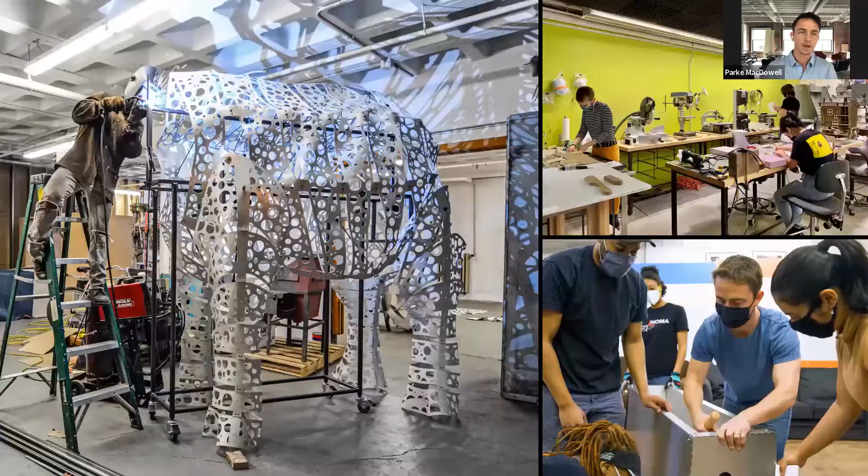Now, I'm going to speak a lot about making things today, but while I am interested in tools and craft, I am most interested in this approach because it has proven to be an incredibly potent way to expand architectural agency, to empower our design process, and to communicate it more effectively. And ultimately, this should be our aspiration as architects. We do not build buildings. We conceive and communicate design ideas, and making things can help us do that better. And that leads to the agenda for this presentation.

But before I get into that, if you'd indulge me, I want to challenge you each with a prompt. What is your role in a story that is bigger than you? How might you take your interests and your experience and your aspirations and compose them into a coherent narrative? And then how do you take that narrative, which is about you, and find a place for it in the broader world? What is your role in a story bigger than you?

And I say this because, well, it's twofold, really. One, because I find it a helpful device for understanding myself and for making decisions about how to invest my energy. And two, I think Earl Flansburgh, whether consciously or not, did this very well, specifically in the way he positioned himself as a vehicle of positive change within our profession, which you see continue even in his legacy.

So now in that vein, if I was to try and put my professional narrative in a single sentence, which is reductive, but I think it can be an asset, that sentence might be something like, I use fabrication to expand architectural agency, to foster shared authorship, and to position my collaborators for success. And over the next 40 minutes or so, I'll show you what I mean by that.

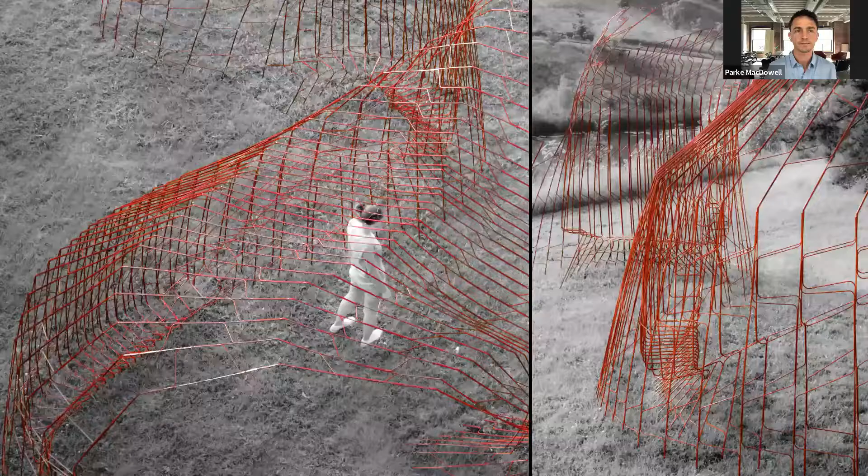I'll start by using a selection of projects to connect the dots from my graduate school exploration to recent forays through my work at NADAAA and various independent collaborations to my role at Payette and to my broader aspirations for architecture.

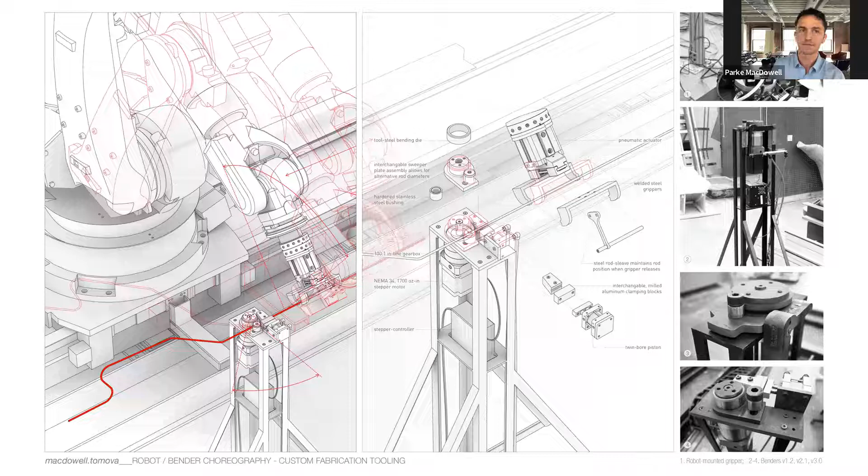Now, this work is from 10 years ago when I was in grad school, and my wife and I made a pavilion out of bent steel rod. And it was large, a footprint of about 20 by 30 feet with a height up to 14 feet. And its form was developed using scripting, as well as the choreography, which was developed using scripting for the 7-axis robot and the bending tool that we built to shape the rods. Each of these uniquely shaped rods was broken into segments of lines and arcs, and then this geometry was parsed into movement commands for the robot and the bender.

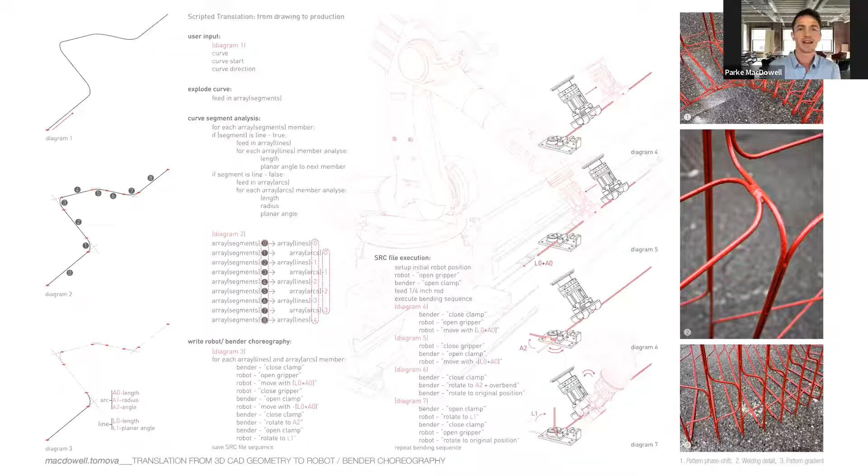And now this work is from last year. And you can see the parallels with the earlier project. The facade sculpture that you see here marks the entry to an apartment building and a courtyard garden on Amsterdam Avenue in Manhattan. And we fabricated it in the shop, and then swung it into place as a single piece. Now, this was a collaboration with Smith & Co. Architects out of New York City and Concentric Fabrication.

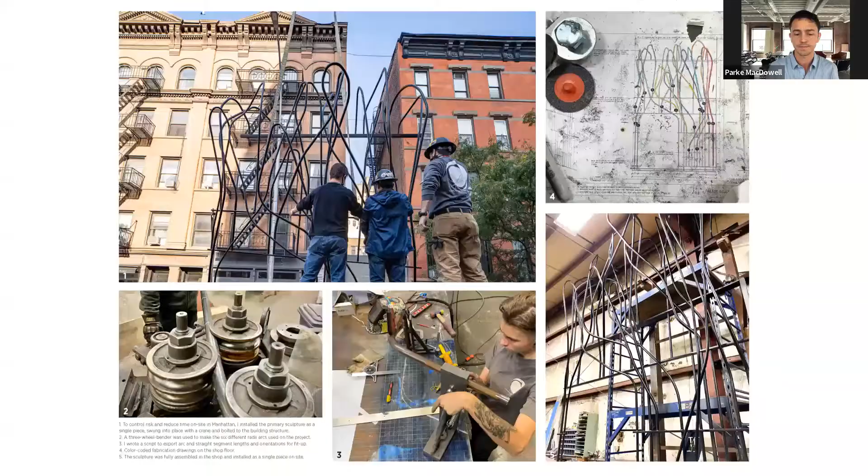And I believe some of these folks are on the call now, but outside of my job at Payette, I do this kind of independent work with fellow designers, with builders, and private clients, particularly on projects with complex detailing, novel geometry. My inclination to strategically collapse this conventional gap between the designer and the builder provides fruitful territory for innovation and added value for all parties. You see some of that process here, everything from shop drawings to the bending tools to the installation on site.

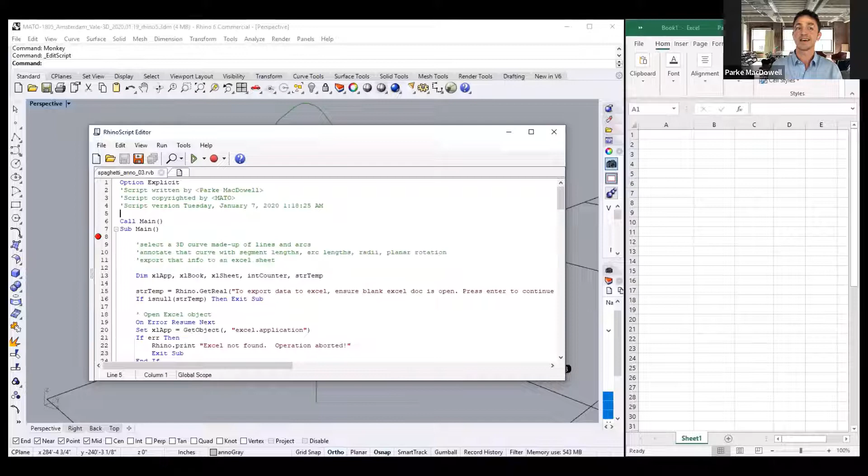And now this screen captured video shows how I took that organic geometry of the sculpture and parsed it into simple fabrication instructions. I separated the unique curved pieces and ran a script, which I wrote to identify the line segments and the arcs that make up each piece, and then export that to a cut list, an Excel spreadsheet, and also annotate the 3D model to include the orientation of each segment relative to its neighbors, which aids with assembly.

This kind of network design process is very much in the spirit of how we work at Payette and also at NADAAA, where I worked for several years right after grad school. I owe a great debt to Nader and to Arthur and Katie and the rest of my colleagues there at NADAAA for shaping me into the architect I am today.

And you can see I crafted a position for myself there, as well as at Payette, that didn't really exist previously at the firm. And that was mostly about reclaiming for the architect some of that territory occupied by the builder, that is actually physically executing our ideas.

And at NADAAA, we did design build work for commercial spaces and custom furniture for private clients, in addition to prototyping and material explorations. And we also made a lot of really exquisite models, which were rarely strictly representational. They instead used abstraction to foreground the architectural priorities of the different projects.

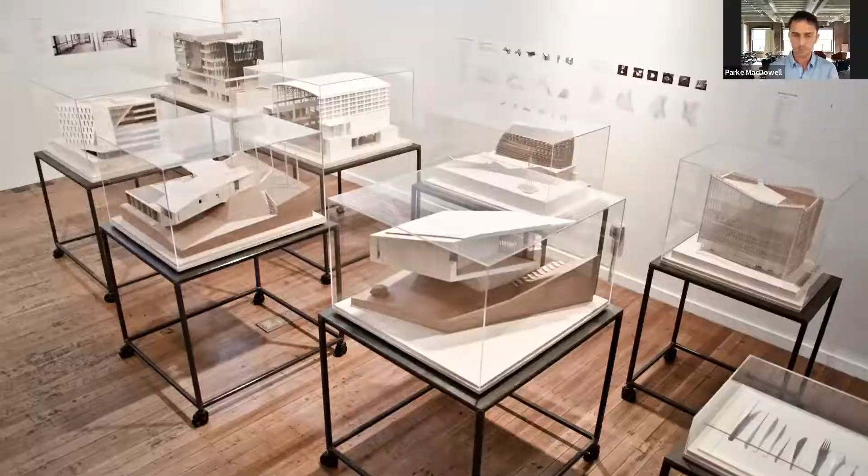Here you see models for 2 residential projects, as well as a section model for the University of Toronto School of Architecture, which I'll actually talk more about the warped ceiling you see in that section in just a minute.

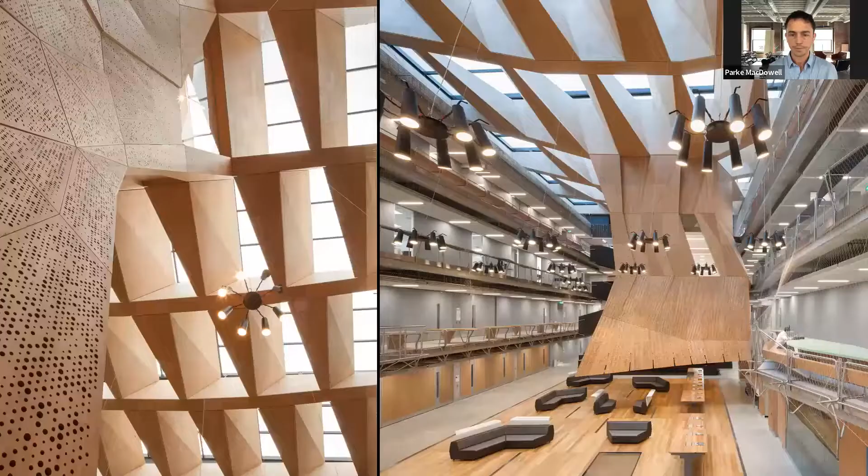Both the fabrication experience and the computational design came into play with this work at the University of Melbourne School of Design. This is a project that NADAAA did with John Wardle Architects, and it supports a built pedagogy where tectonic and programmatic relationships are expressed in an exaggerated way to encourage academic dialogue.

What you see here is the suspended studio, we called it, which hangs like this distended coffer in the center of the atrium. And it's actually really important for the acoustics of the space, both in its geometry and in the scripted perforations that you see in the image on the left.

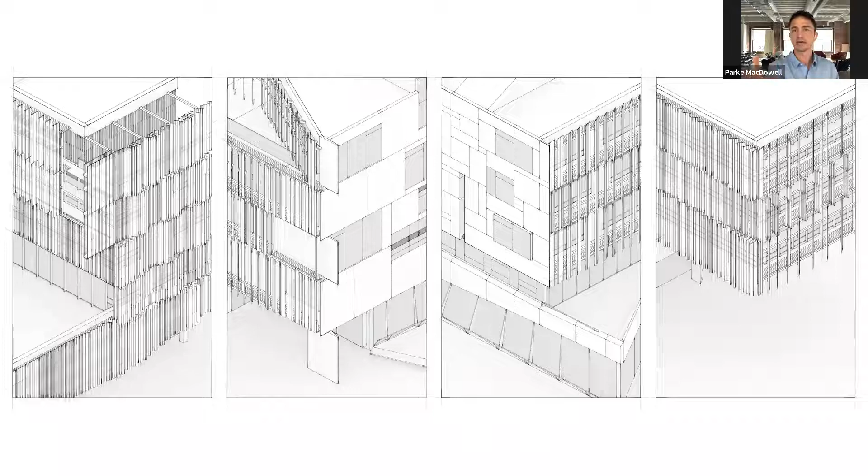The exterior of the building is similarly didactic, that is kind of about teaching. Each of the 4 elevations of the building is doing something different. So the corners where these faces connect become an expressive representation of the dialogue between these different actors. And it's those vignettes that I documented in this drawing. And you see it play out in the actual building. You see the southeast corner shown here, where 2 of these different faces collide at the intersection.

Previously, I showed that section model of the Toronto project, the School of Architecture. This project was a really important affirmation for me of the value of having in-house fabrication capabilities in an architecture firm. We had this exuberant warped ceiling, and it had skylights in it. It really dominated the expression of the upper level studio, which was one big room. And it was in danger of being cut from the project because it looked unconventional, and the builder had priced it with the expectation that it would require custom architectural framework and specialty plastering.

But by making a full-scale mock-up, we showed that this hyperbolic paraboloid shape could actually be made with straight metal studs and conventional drywall detailing. And this was huge. It reduced the price. The contractor rebid it and reduced their cost by 50%. And this overall key design feature remained in the project.

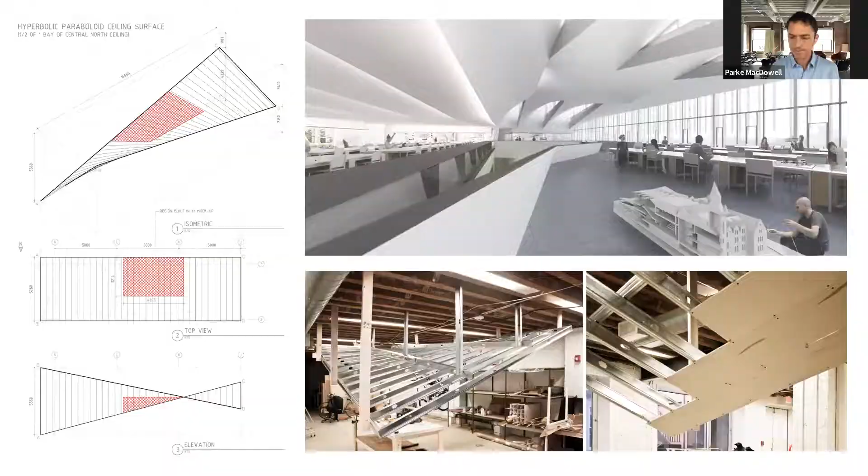Here you see the full-scale mock-up that we made in our basement shop there. And here's the same approach deployed at full scale on site. And now the finished result. It's an incredibly powerful way to retain architectural agency. And that kind of approach, it adds value at any scale.

If we can embolden ourselves as architects to consider the means and methods as part of the design process, we can do incredible things. I'm not saying we should own the means and methods contractually. Usually we definitely should not do that because it's not under our control, but we should own the means and methods intellectually, in dialogue with the builder. This is how we win design authority.

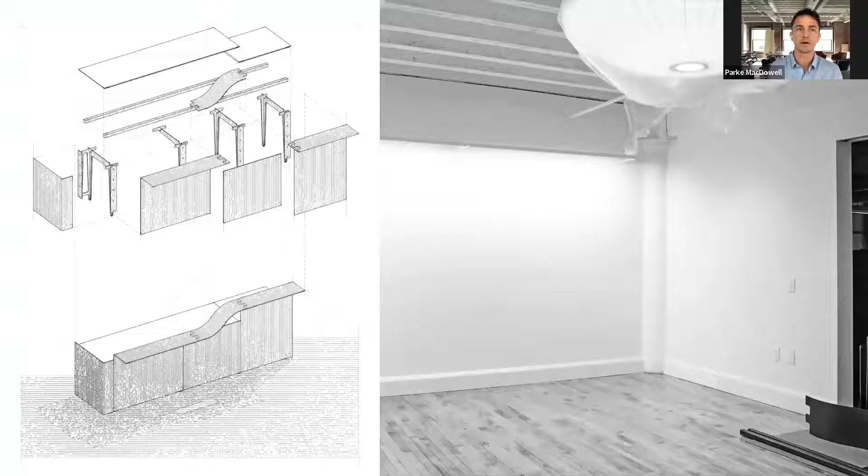You see in these images a few smaller collaborations with other architects in Boston and New York City, like ZH Architects and Chad Smith. On these projects, I was the metals fabricator and a design consultant to the architect, contracted directly with the owner. This was a recent furniture installation with Mark Carriega. And by intellectually owning the means and methods, we were able to wed the geometry with the fabrication constraints and the logistics of installation to produce a really successful project.

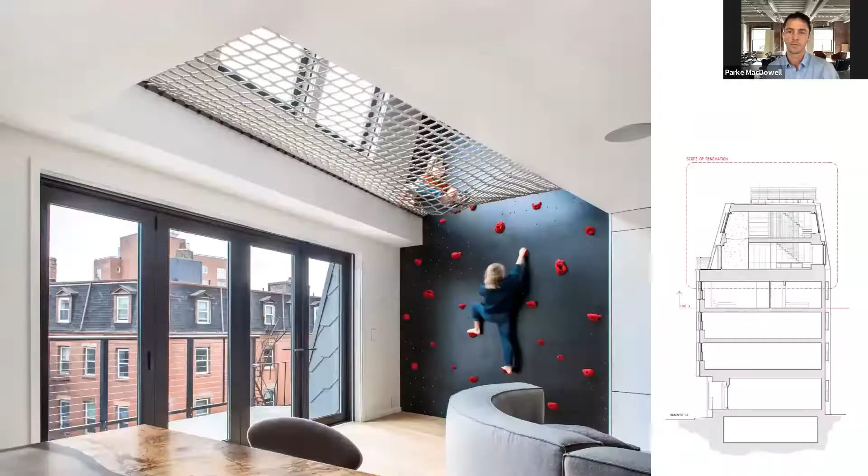And when I am both the architect of record and the specialty metals fabricator, this effect is magnified. This was a renovation project for a client in the North End whose kids go to school with my kids. Their apartment was the top 3 stories of the 6-story building. And the top 2 stories actually were an unpermitted addition from the early 80s, and it was plopped on top of a 100-year-old tenement building. And that addition was their primary living space, but it was cramped and closed and inconsistent with the way they aspired to live.

So we reconfigured the vertical circulation. We made it more efficient. We opened it up to the city and the sky and had a bit of fun with it. It was an ideal client and an ideal scenario where they invested in thoughtful design early in the process. They locked in decisions and then allowed construction to proceed linearly without any significant changes.

So this section shows the thick poche of that original roof and the stacked stairs, which was part of our renovation. It led to a huge operable skylight in the roof deck. Then you see also the rock wall and the climbing net and the folding glass doors that open to the street along the 5th floor frontage.

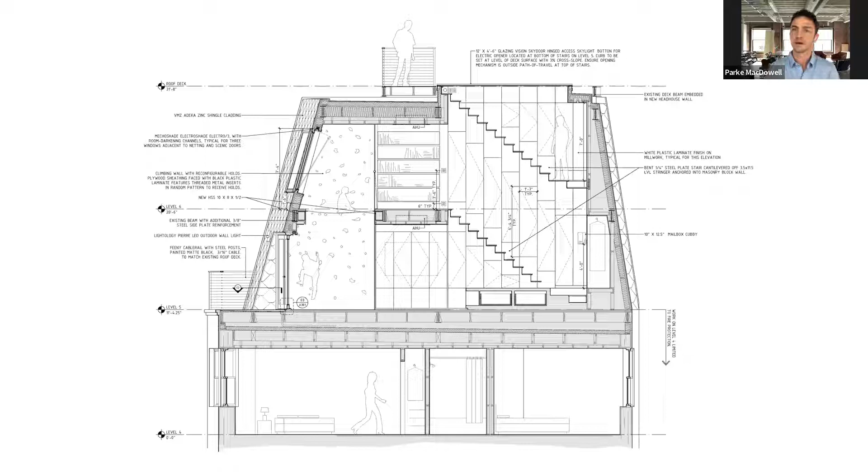This is a lot of steel for a residential project, but it had some curious loads. And the structural engineer for this project was Becker, which became Thornton Tomasetti partway through. And you can see what the implications were. The builder, Konya, did a great job executing this work as well as the overall scope. And then Jedi and Sun Engineering did the MEP and the HVAC. It was a great team.

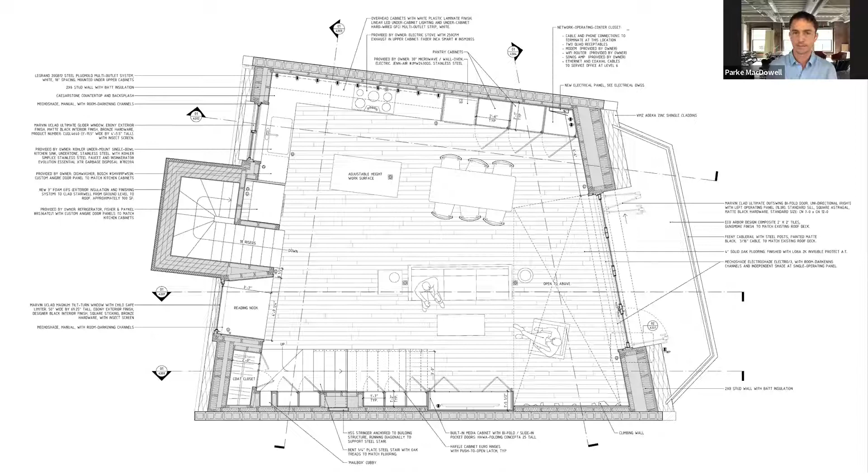This plan shows the 5th floor. It's a single open space for the kitchen, the dining, and the living room. All the odd angles of the existing condition were both a challenge and an opportunity for this project. There wasn't a right angle in either plan or section.

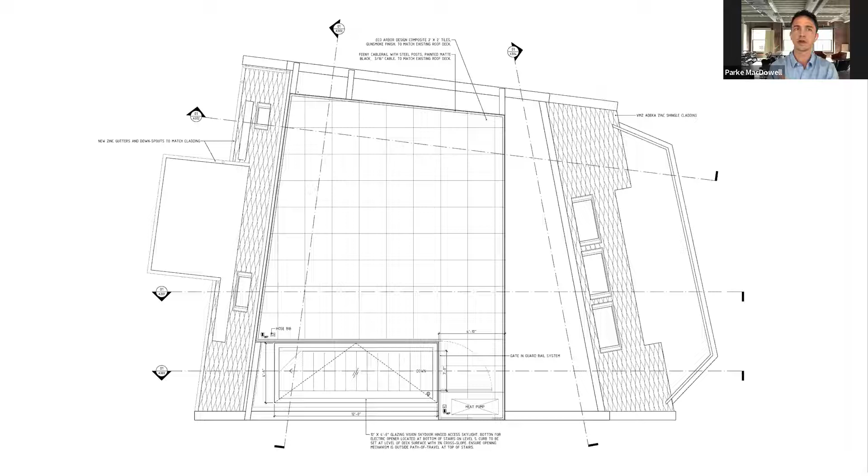We didn't want to go through that protracted process, and we had a very tight budget, which is why, though we had a traditional design, bid, build procurement process, I ended up taking on the key specialty features myself. And that's the climbing net detailing and the custom stair. Because I'd already figured out how to build that stair and the net in the process of doing the architectural drawings, I could underbid any of the specialty metal subs and still maintain healthy margins.

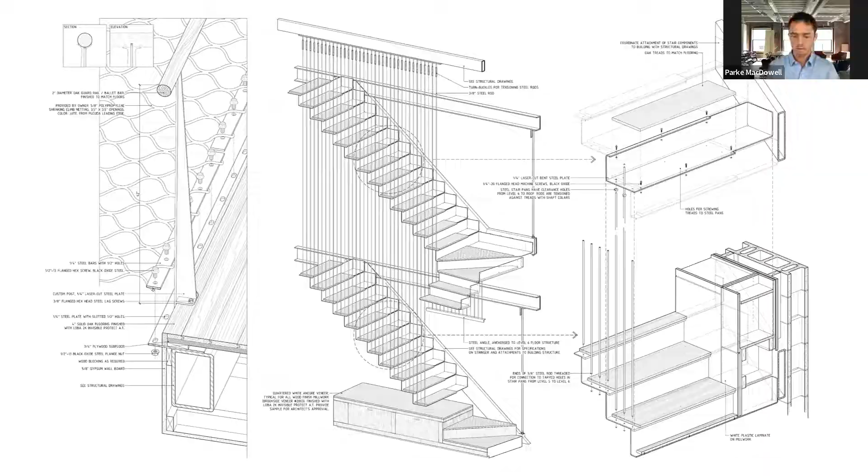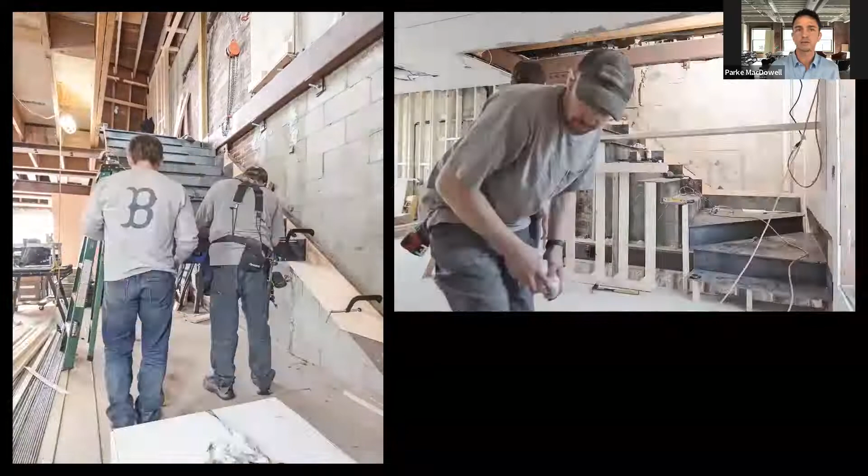You can see these drawings in front of you. They were actually pulled directly from the bid set and the permit set. So it was highly resolved. And so we built it. And you see that process unfolding here. We went from a detailed 3D fabrication model in Rhino to the cut and bend files, which I sent to the material supplier. And then we installed it on site with great speed and accuracy.

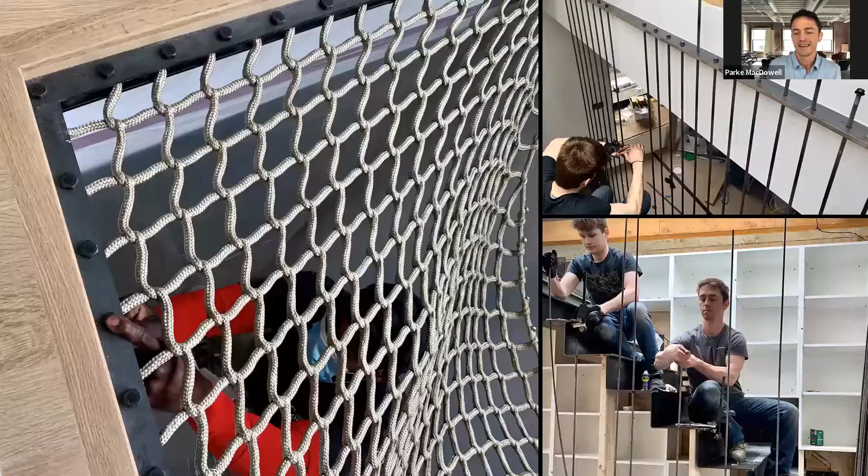Here you can see us cutting threads in the top right image in the top of the rods, so we could tension the 3/8 rod on the far side of the stair. Also the clean detailing of that robustly engineered climbing net, from which you can look 6 stories down to Hanover Street. And then some images of the completed stair to the roof deck at the conclusion of the project. If you look carefully, you can see the hidden storage wall behind it.

And actually the winders that are shown here were a late-breaking addition to the project to accommodate some unforeseen structural conditions. But even though it wasn't in the original design, it became one of my favorite details. And I kind of relish it, even as a little lesson. When things go awry, it really lets us show what we can do. And so this was one of those opportunities.

But regardless of whether it's the design of an object or a small residential project or a large academic or medical campus, I'm really just deploying the same bag of tricks. I'm inspired by the discovery and the cultivation of relationships, whether it's the intricacies of a connection detail or civic scale social choreography, arranging shapes, composing a project team. For me, this is the essence of design, the manipulation of these relationships, the crafting of these relationships.

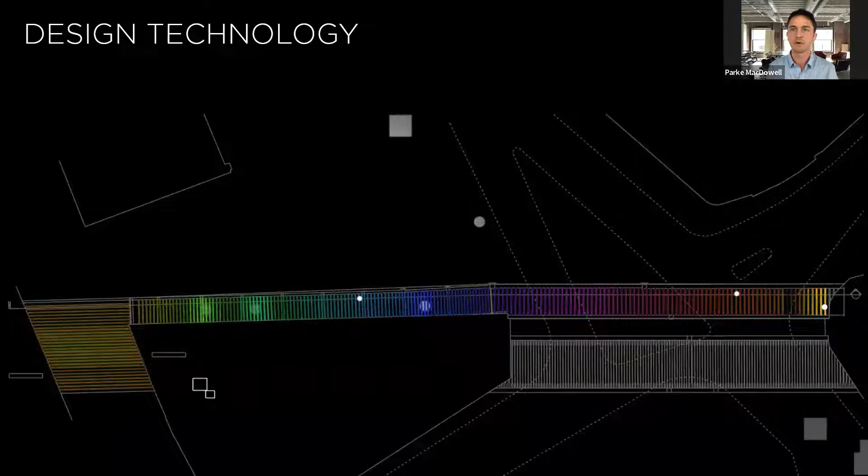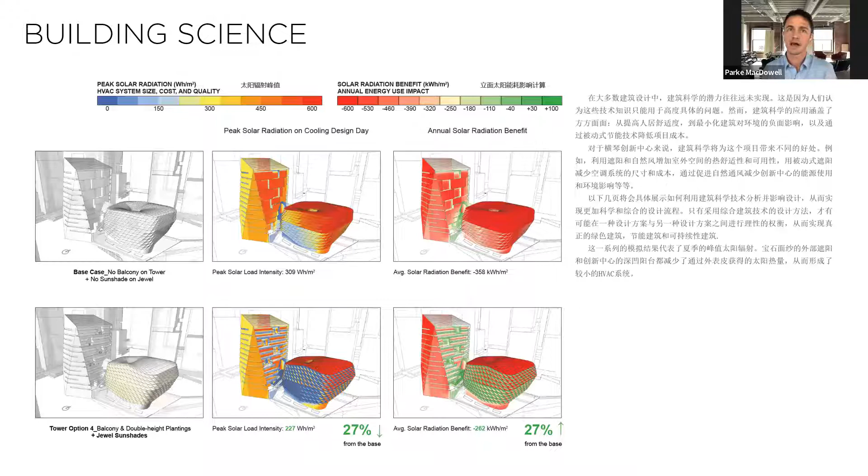Our building science group works side by side with our designers to ensure we're consistently forging new ground on issues of technical performance, sustainability, responsible design. And in the process, we educate and empower all of our staff to develop their own expertise.

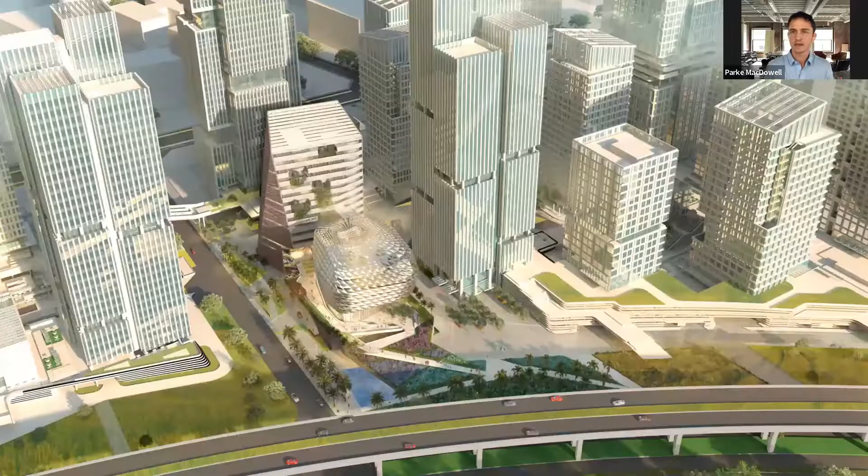And in so doing, we're able to deliver an architecture that is more formally exuberant, more delightful from the experiential side, because its aesthetics are underpinned by this rigorous analysis, like this research tower and a conference center in China. It's actually under construction right now in a brand new science city.

And the solar veil that you see around this conference center, it was an area of particular focus for me, both in the development of the geometry, as well as in the communication of the core design priorities and the tectonic logic to our collaborators overseas in China. I'm actually going to work on this right after this presentation.

We're developing a mock-up to show how they can build these custom curving sunshades. Every one of them is a unique shape, but I think we can build it all efficiently out of flat laser cut parts. So that's what we'll prove later this week.

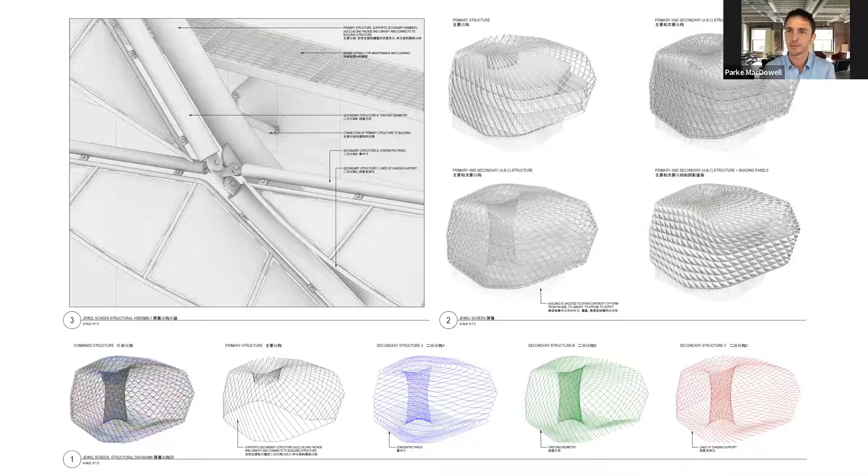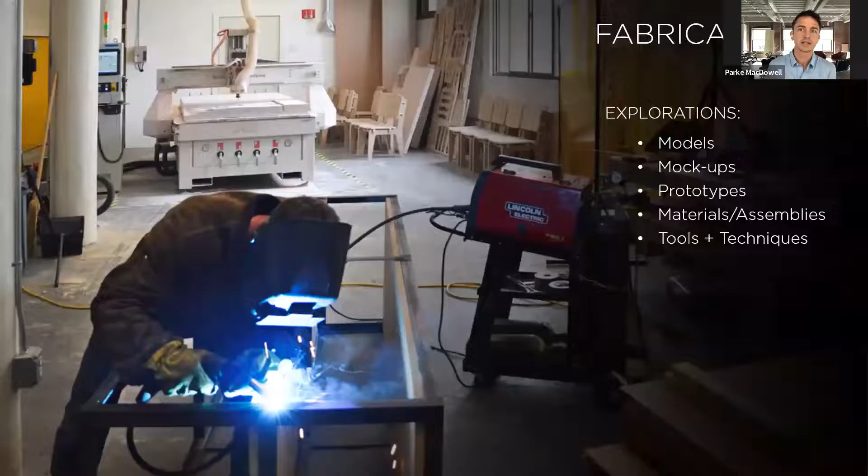In-house fabrication, it's become a defining aspect of our design process and who we are at Payette over the last 5-10 years. This is something that's really burgeoned and it continues to evolve. For us, in-house fabrication is not about tools and equipment. It's about positioning our agility and our energy for maximum effect in the face of what are inevitably evolving aspirations and opportunities. That's why we're here.

That's why we're making the models and the mock-ups, the prototypes, the furniture. This is the process we want to support. We make things to support those broader priorities. How do we make both our architecture and our design process itself more engaging, more thoughtful, and more beautiful?

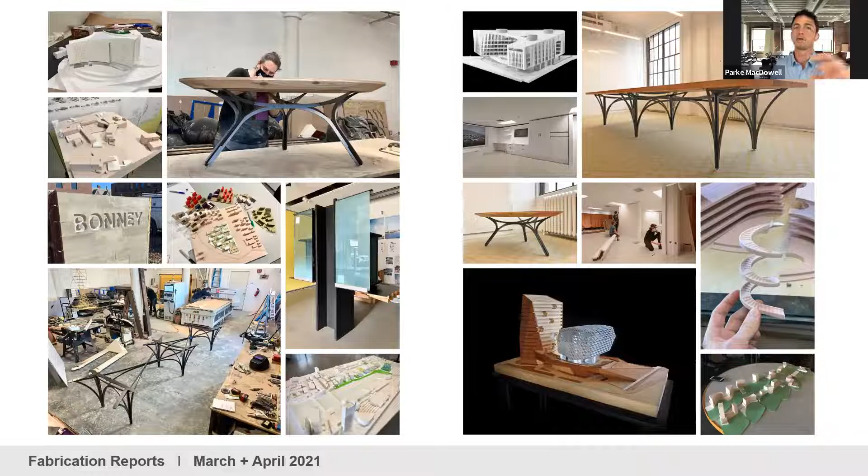What I'm going through here now are snips from our fabrication reports, each of these squares representing a month, so 2 months per slide here. My role is really about crafting a curriculum and a culture that enables and channels this energy.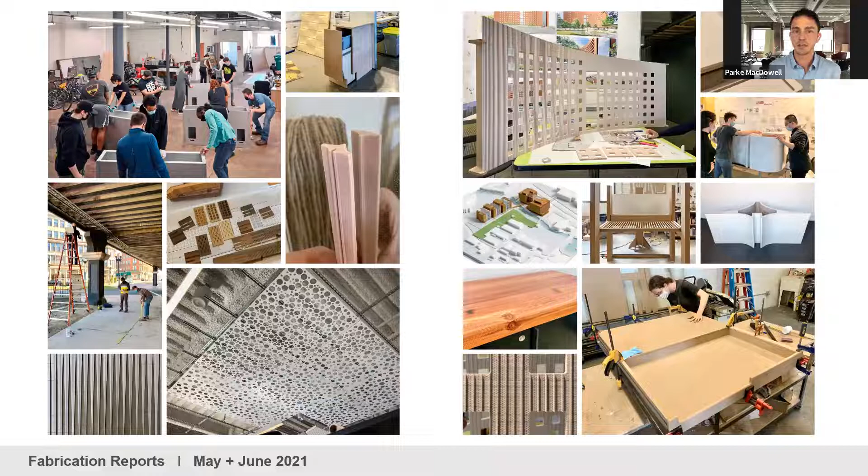We've got a model shop in the middle of our studio, just across the hall from where I am now. And then we also have a fab lab, a rough space where we've got our CNC router and our welding equipment. Here in the office, we've got our laser cutters and 3D printers and the rest. And we make these models and mock-ups and prototypes, and increasingly we're doing furniture installations as well.

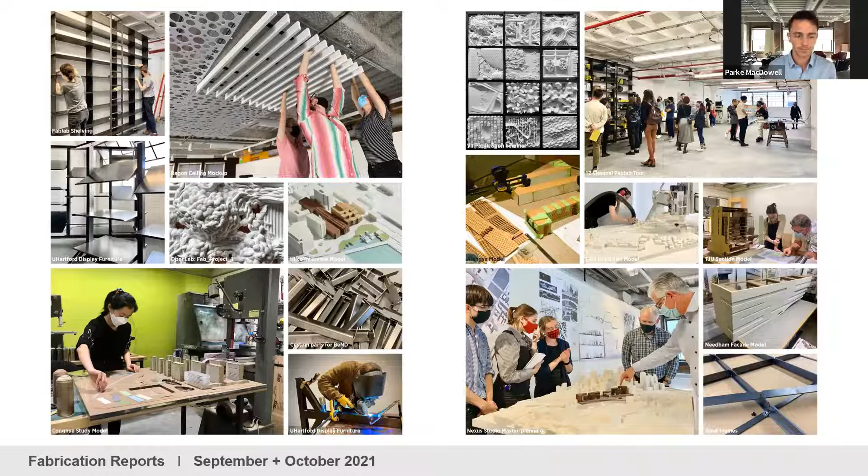Within our larger projects, this is a growing priority and something you'll continue to see if you stay tuned in the next couple of years. And while I've got a dedicated staff of designer fabricators who do things like operate the CNC, the bulk of the making happens within the core project teams.

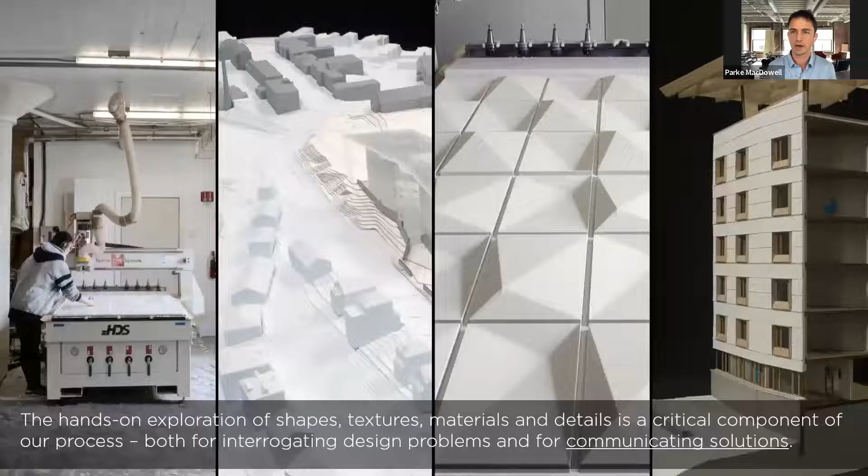Here, for example, is a typical set of artifacts that might come out of a single project at Payette. An interior mock-up for the space planning and finishes, study models, full-scale facade mock-ups, section models to communicate key building systems.

Making clarifies ideas, and clear ideas enable decisions, and decisions move projects forward. This process is central to our workflow. It's now central on all of our projects because it works. Models and prototypes help all parties understand the problem and have a voice in its resolution.

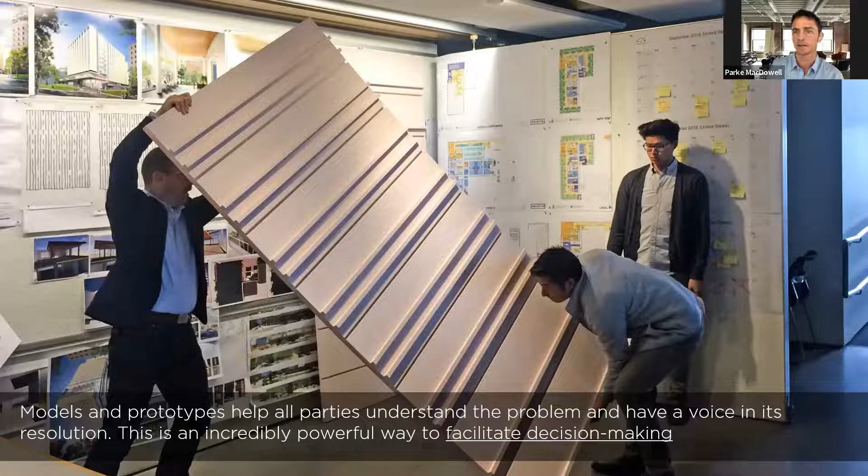And earlier I mentioned strategically collapsing this gap between the builder and the designer, providing extra value by recognizing both the constraints and the opportunities of the fabrication process, best known by the builder, and then the aspirations and the client needs, which are best understood by the architect. So if you meld these two together, you're able to deliver more of each, and that's where you really get success.

And then finally, looking forward, fabrication can provide this really engaging entry point for underrepresented demographics into the profession. And so with this mindset, I've done a collection of youth-focused workshops where we were building that day, but really we were building for the future.

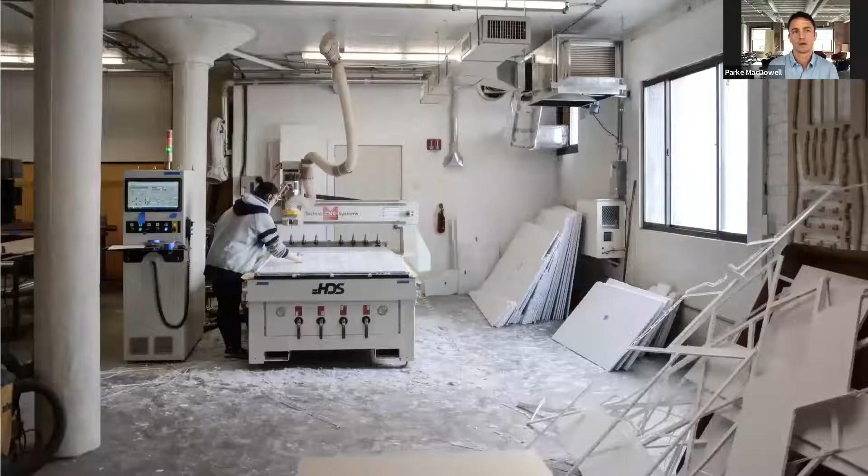Some examples of how this process plays out on our projects. Early in the design of a Veterans Affairs soldiers' home, we built a full-scale mock-up of a residence room. And that was so we could solicit feedback from the users, including nursing staff and patients and the facilities team, feedback that we might not be able to get via a typical process, sharing drawing sets and images.

And this was a full-scale mock-up that we built in the basement of the existing building. And then we supplemented the experience with augmented reality, which allowed us to apply materials to that white box by looking into a device. And the whole experience was really a powerful way to position the client as co-author. This ties back into the way I titled this presentation.

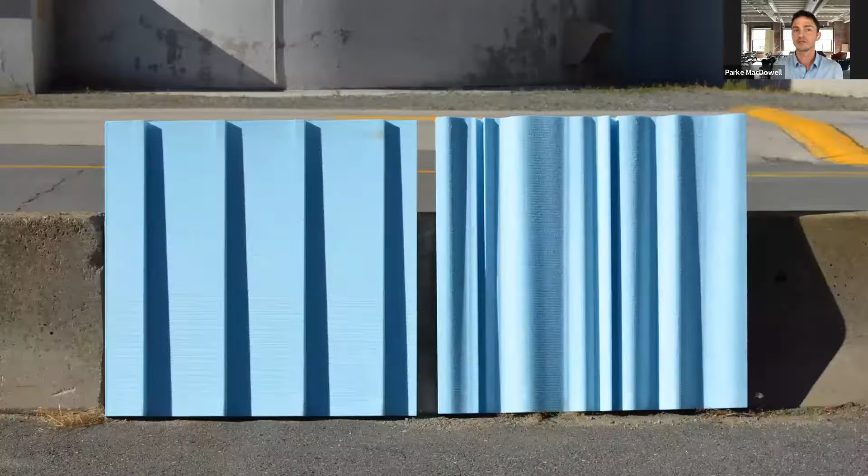We use a similar set of techniques to support our geometric explorations as well. Here you see some early mock-ups and the completed project. There is a readily discernible relationship between our process and our executed work.

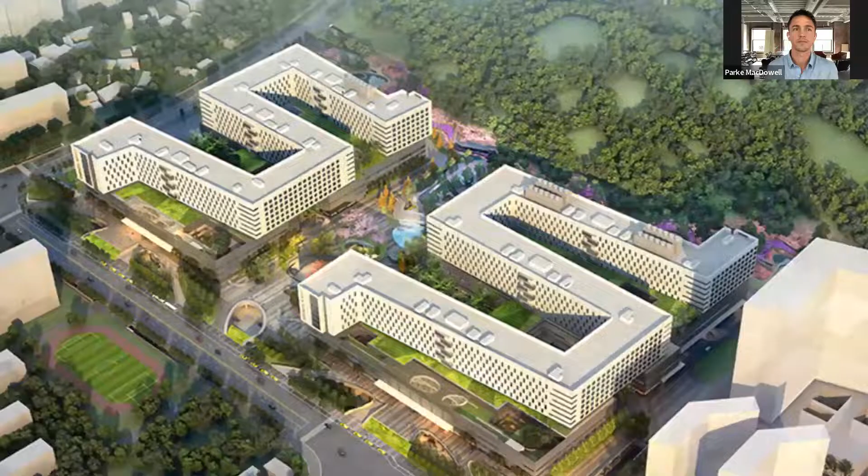Both the human and the formal implications of this approach are evident in this massive hospital that we're doing in Changsha, China. We just completed this model at the end of last week, actually. It's a straightforward parti diagram, really, but that's the armature for an intricately sited project.

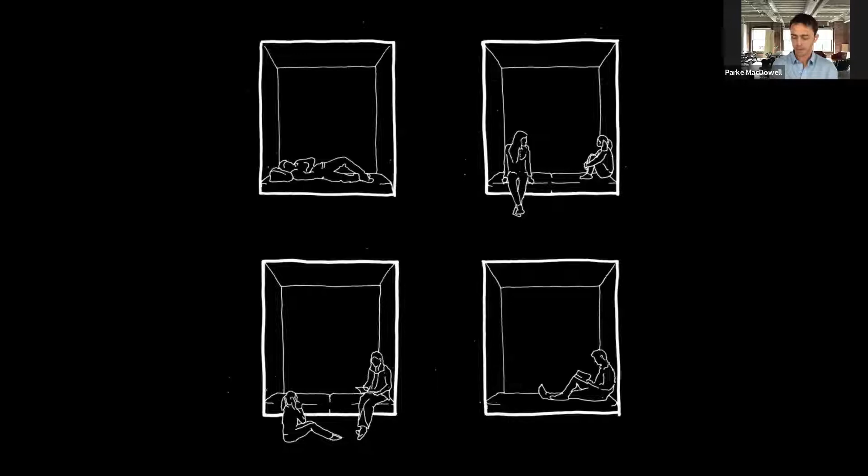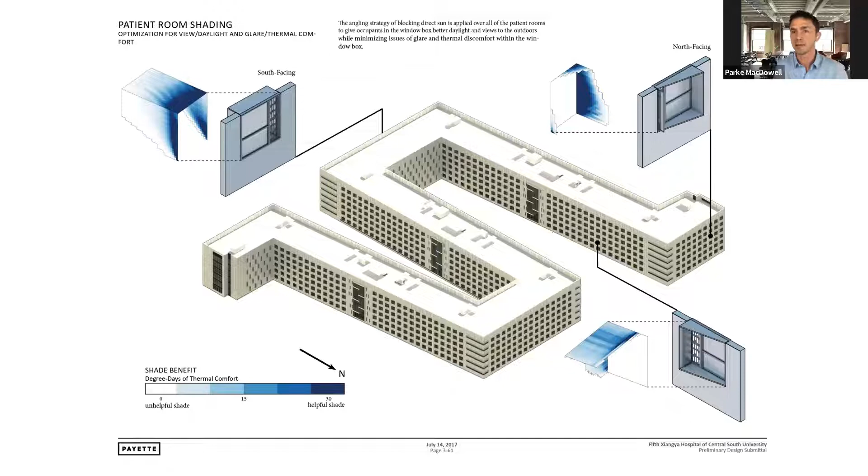Now, a defining feature of our winning competition entry, this was a competition that we won actually for this project, is this window box that both humanizes the patient experience and supports the energy performance requirements of the building. It provides daylight and views and natural ventilation, but the exterior cowls of these windows, the hoods, the shading devices, were at risk of being value engineered out of the project. So we made a mock-up.

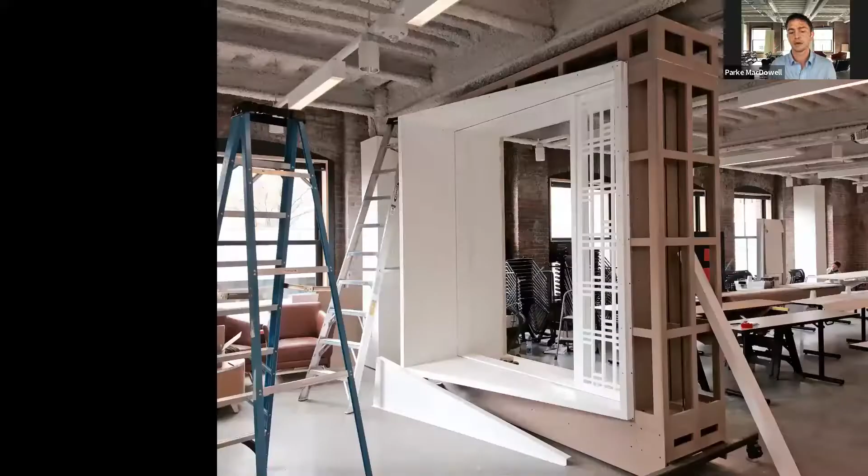We made this to better communicate our design priorities, and we fabricated it in our shop, and we assembled it in the office. You can see on the right here the evolution of the design from the initial concept to the mock-up. And we made this mock-up actually in preface to a visit from a large contingent of our Chinese collaborators.

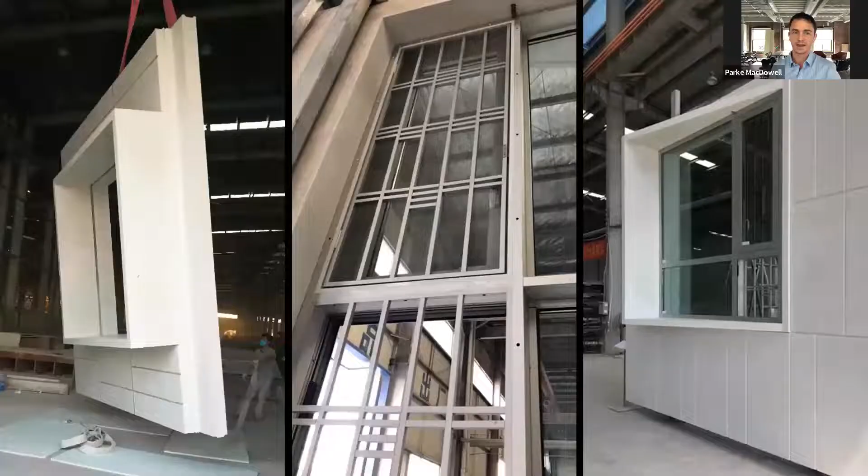And even though few of them spoke English and only 2 of our team spoke Mandarin, when they saw the mock-up, they immediately understood what we were trying to do. And so the feature made it into the project. This is another project under construction right now. Over 2,500 of these window boxes with custom angles in response to solar orientation. We won design agency because we communicated effectively through fabrication.

This will be familiar to some in the audience. Like I said, many friends.

So on this project, it's the pedestrian crossing. The bridge specifically was one in which I had a key stake. And it's another project where in-house mock-ups led to elevated value and an example of how the strategic collapsing of the divide between architect and builder allowed us to win design authorship when otherwise we would have lost it.

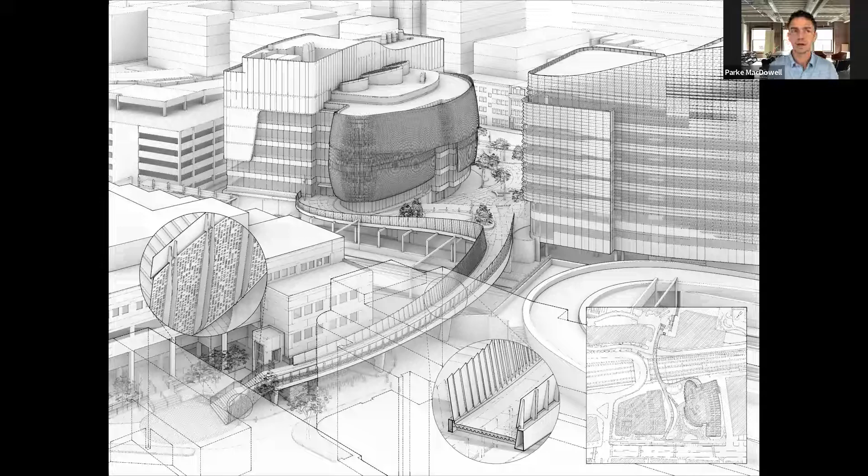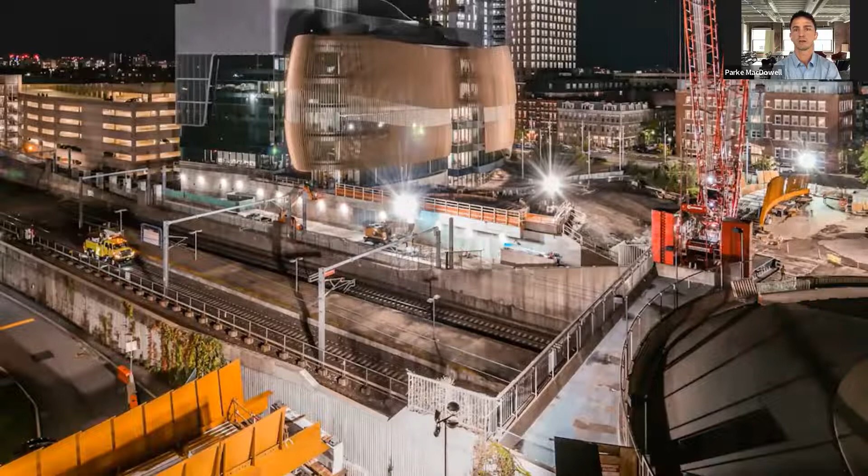So the bridge crosses over 5 rail lines to connect the main campus to the growing science and engineering complex to the south. And we began with drawings and more exquisite models. And we delivered something incredible. Working over the railway tracks is expensive and challenging. Logistically, it's a whole series of headaches, but erection must be done swiftly and safely.

So our approach was to fabricate as much as possible in the shop, assemble the remaining elements in the laydown yard adjacent to the site, and drop the primary spans in place overnight. These structural assemblies were fabricated in Texas by a group called King Fab, shipped to Boston for on-site assembly and installation by Atlantic Bridge.

These panels of weathering steel stretched up to 20 feet tall, culminating in a kind of gateway feature on the science campus. And then they swoop across the track with this scripted shingle geometry, providing a dynamic experience, which is canyon-like when going from south to north. And as you go north to south instead, it fans open, exposing views to the new science building, as well as downtown Boston.

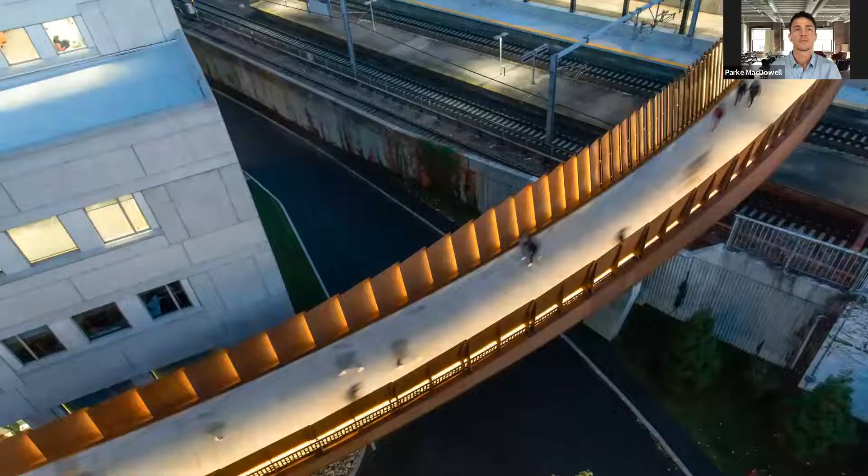And this view shows the energetic trajectory of that bridge and the panels as they morph across its length. But it almost wasn't as good as it ended up being. Specifically, when that bridge approaches the main campus, one side becomes diaphanous, increasingly transparent. You can see our perforation pattern from the bid set in these mock-ups.

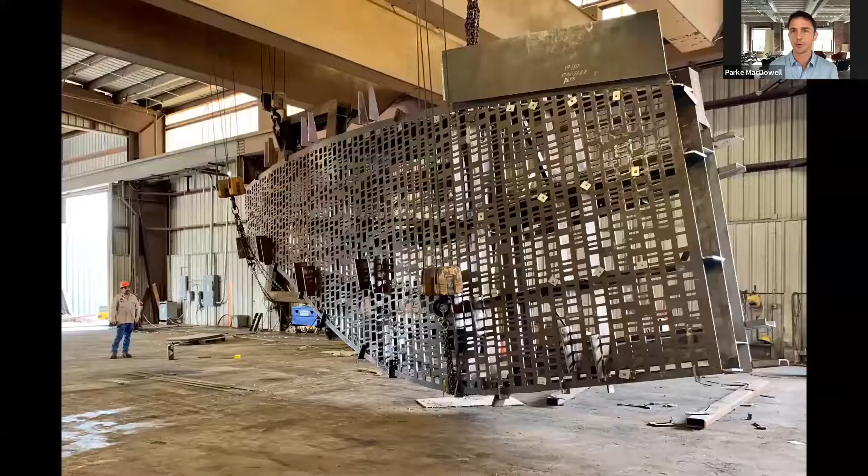And these mock-ups showed us that the pattern that we had selected had actually reinforced the gaps from the secondary stiffeners. And we had hoped to suppress these gaps in the pattern. We wanted it to read as a continuous field. So at the 11th hour, we said, stop, we can do better. And we did. We developed a pattern which hid the stiffeners within this field of perforations.

This image is from the shop down in Texas, where we listened to the fabricator and we got more of what we wanted by acknowledging their expertise, especially on this piece, which was conically rolled with overlapping plates. It really came out well, far better than it ever could have been if we'd said, no, this is the way we designed it, let's not even talk about it. So that was a great lesson as well.

This is that piece as it lands on the campus next to the library and the core design studios. But enough of architecture, let's speak of community. I want to conclude with one more project. It's a collection of related pro bono endeavors.

We believe in the agency of the built environment to shape community, and specifically in the power of art to influence perception and engagement and patterns of use. And incidentally, this project, as well as the bridge, both received National AIA Urban and Regional Planning Awards. So it's funny that they both happened in the same year as well. They're so different, but they share some of the same spirit.

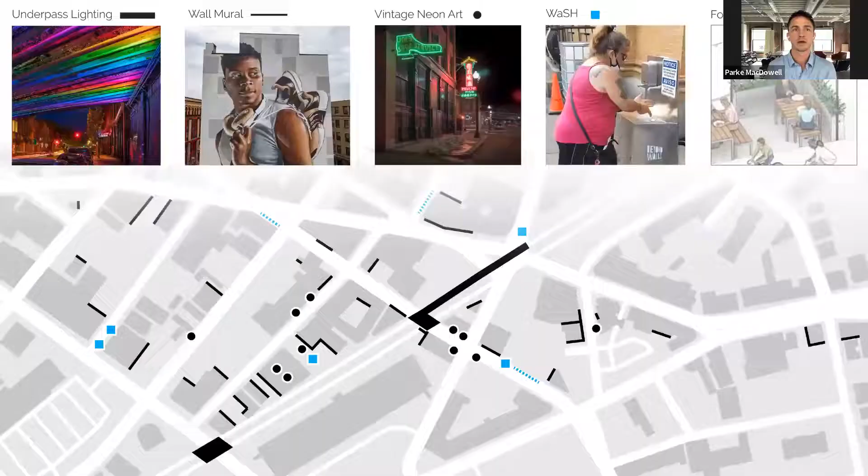And it's upon this principle that together with a host of collaborators, Payette built a nonprofit entity in an underprivileged city just north of Boston. And this group called Beyond Walls, it aligns its arts initiatives with the strategic goals of its community partners to improve these places where we live and work and play. They engage the local stakeholders, both in defining the problem as well as in developing the solution.

And this approach very rapidly delivered successes in communities like Lynn, where this constellation of urban improvements changed the character of the city. We enhanced walkability with repurposed vintage neon signs that pull pedestrians through the downtown commercial area from one destination to the next. And over 100 murals done incrementally over a series of annual mural festivals. They elevate the stories of the community, saying, we are here, our stories are worth telling.

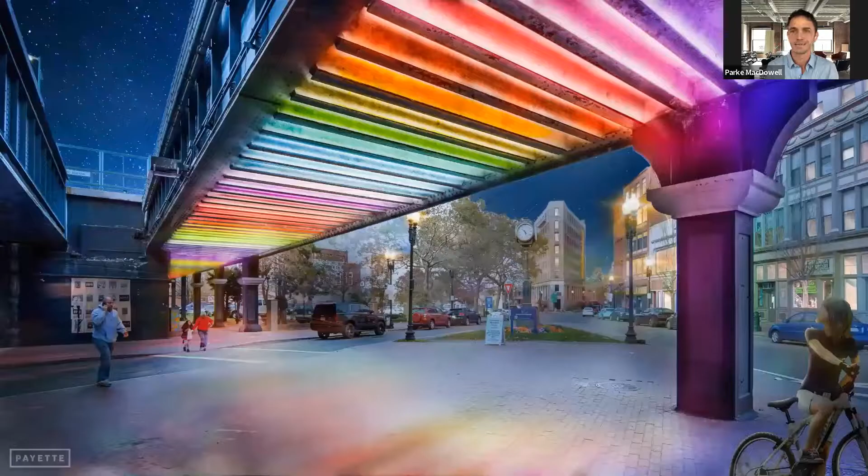This rail line cuts straight through the center of downtown Lynn, and it produces a series of dark underpasses, which are areas of increased crime and vehicle pedestrian accidents. And the community said, we need better lighting in these underpasses. And we said, let's take it one step farther. Let's make it epic. And we did, from rendering to executed work.

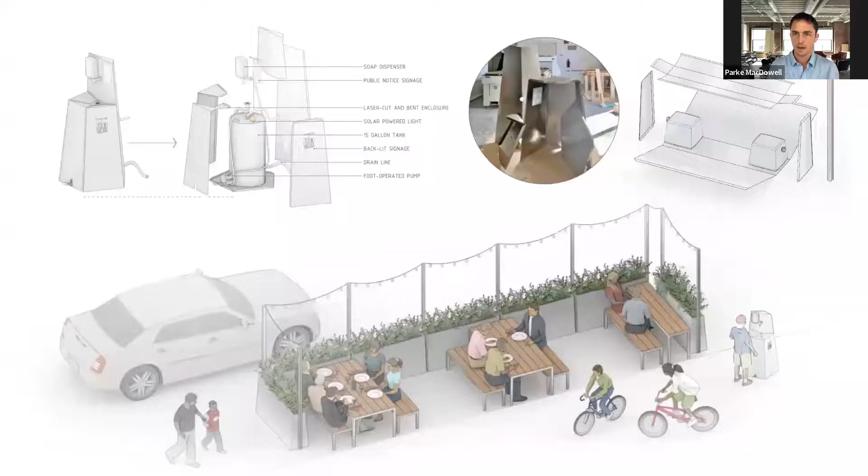On these community-led projects, it is vital that we as designers are not coming to the table with the solution in hand. Instead, as I see it, my role is to provide an injection of energy and expertise at just the right time to catalyze the efforts of these community stakeholders. And then the pandemic hit, and it changed everything.

But one of the opportunities that was embedded in the challenges of the pandemic was this reclamation of outdoor public space for public use. What was a parking spot serving just a single private vehicle might instead be converted into a public amenity that serves dozens, and it provides ancillary benefits for local businesses and public health and wellness.

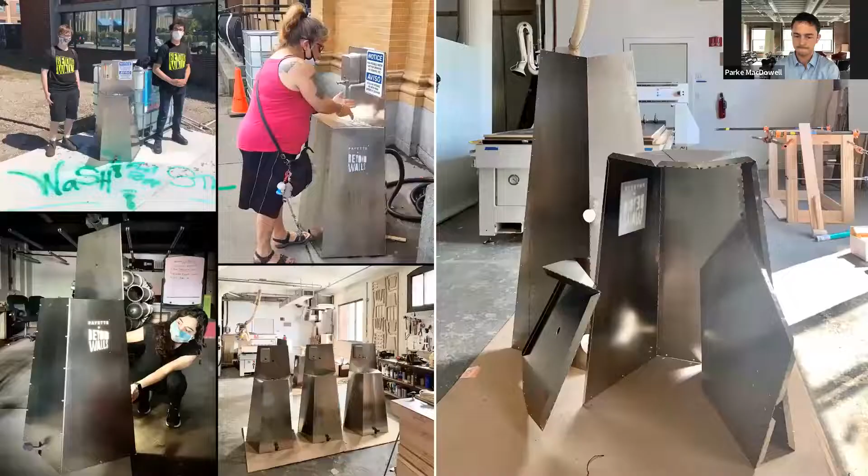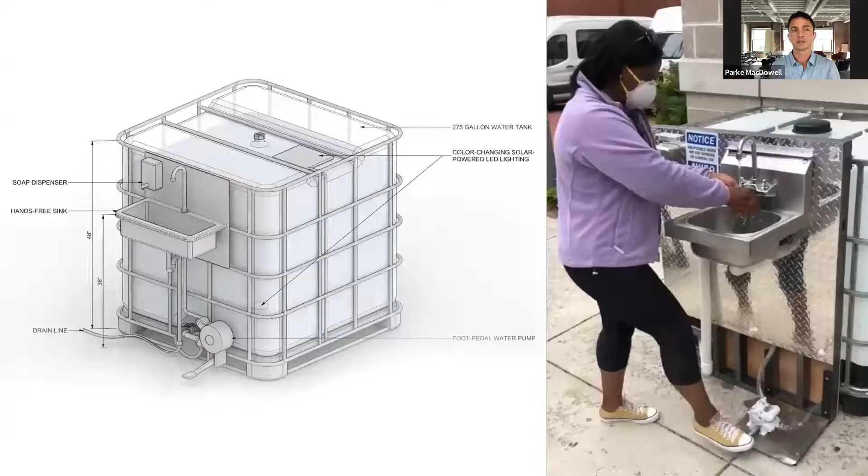WASH came out of a prompt actually from the Lynn Community Health Center. And they said at-risk populations, particularly the homeless, no longer have ready access to hand washing because the restaurants and businesses were all closed. And so it was impossible to do this via conventional means. We couldn't just purchase the products because all of the off-the-shelf portable wash stations were on back order. So we quickly cobbled together a working prototype from an old irrigation tank and bilge pump.

We did a couple of these, and then we refined the project and the product using digital fabrication and assembly labor from paid students at the local vocational high school. And after a few more iterations, it became a rather lovely object. It's a piece which says this community is deserving of well-crafted public amenities built by people who live in this neighborhood.

And so the business community and the public officials saw the success of WASH, and they thought, we need something like this to support outdoor dining. And so Fold was born. These are almost metal origami, they're cut and scored on a laser cutter and then bent by hand into position and screwed in place.

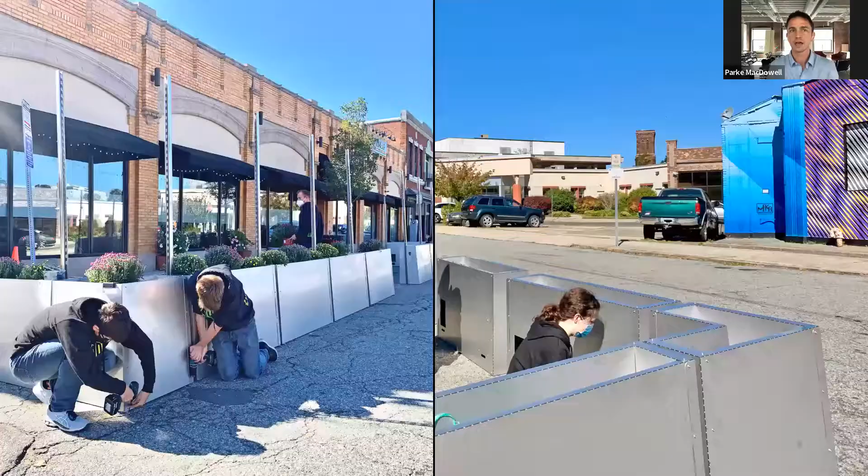Now, this conversation about mixed use or pedestrian-centric streetscapes, it's long been cited in planning studies, but it is immensely challenging to muster the political will to execute these interventions. So in this light, I am keen to capitalize on our current momentum to deliver fast, attainable, meaningful change. And perhaps more importantly, I want to pioneer a process that is replicable across numerous communities.

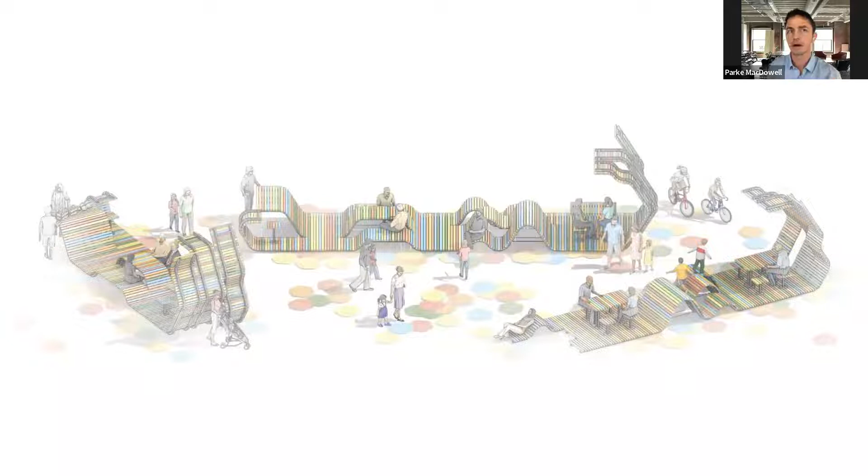The key thing here is the engagement of the end users in the development and the execution of the initiatives. A successful project is one where the community it serves feels a sense of authorship and ownership in the work.

We've got a few fun things cooking. I'm not even going to tell you about these projects. We'll see in a year or two.

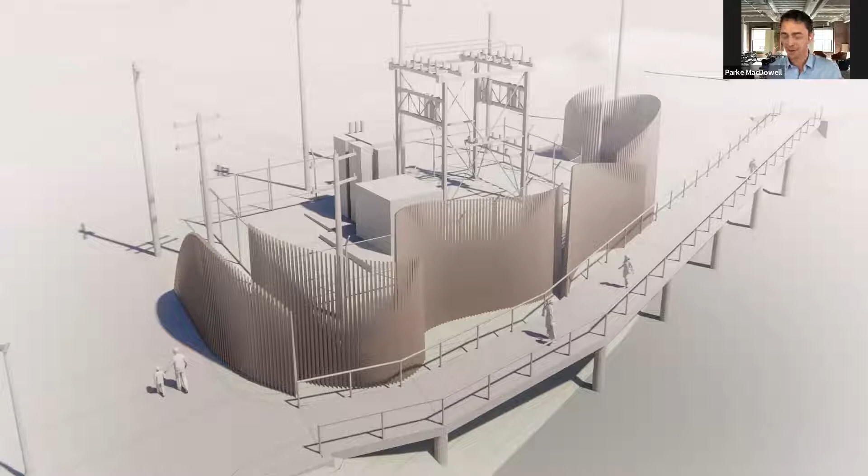But as we all know, the pandemic disproportionately impacted groups that were already disadvantaged. It's highlighted the inequities that are codified in the built environment, particularly with respect to wealth, race, and gender. And so in this light, I've begun to think about public shared space as the key battleground for combating this built injustice. And it's not just about public work. With every project, we must ask ourselves, how can we build in amenities that serve a broader community beyond the bounds of the project brief?

As an architect, I think our charge is to provide design that is inspirational without being prescriptive, and to approach the design process with an openness and a kind of humility that invites many voices to contribute. What is your role in a story that is bigger than you?